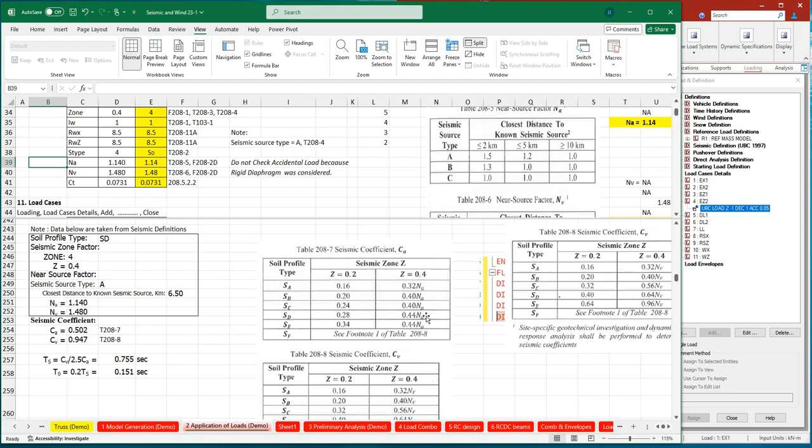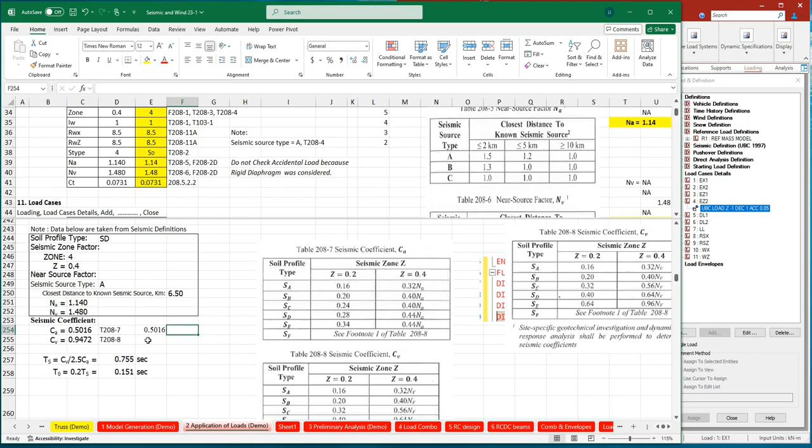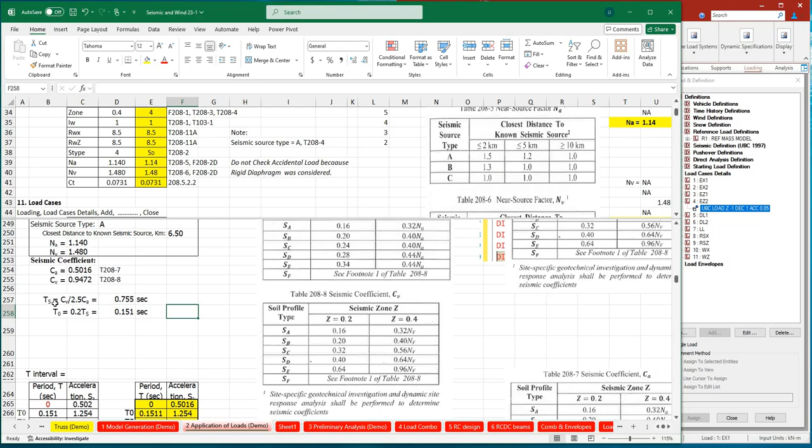And then, etong CV naman, that is from table 208-8. CV is 0.64 NV. This is based on 0.4 tsaka SD. So, that is equal to 0.64 times NV, 1.48. So, yan ang 0.9472. Next, punta tayo dito kay T sub S.

T sub S, yan yung period ng structure, which is equal to CV divided by 2.5 CA. So, that is CV 0.9472 divided by 2.5 times CA. Ayan. And yan yung 0.7553. And then, yung T sub O, that is equal to 0.2 times TS.

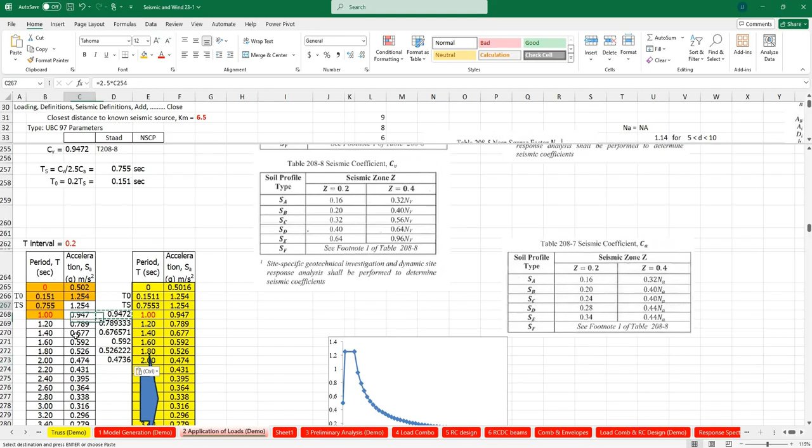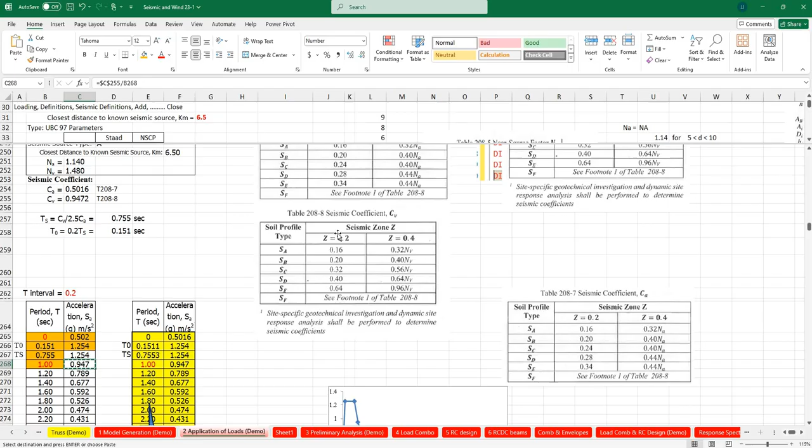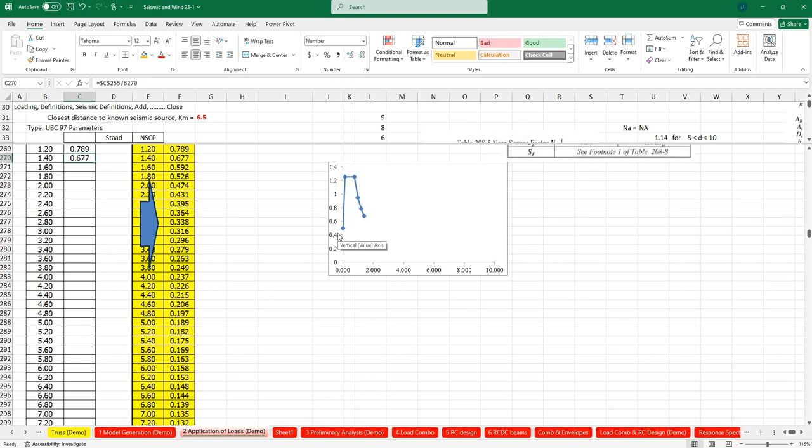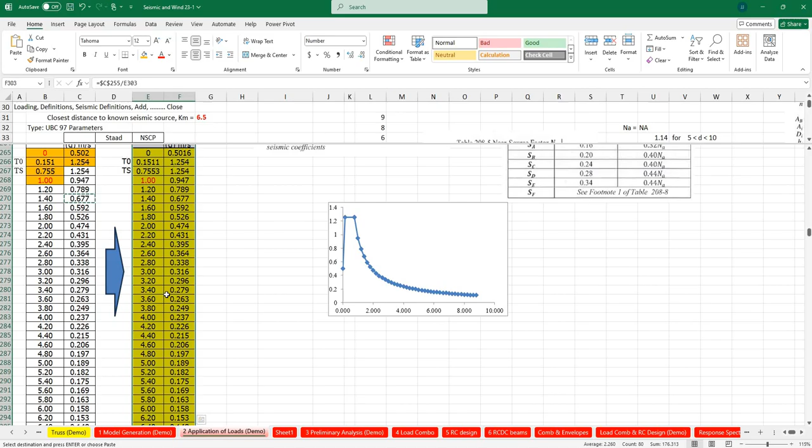Okay, so ulitin ko. This is equal to CV divided by period. So, I will press enter. Pero itong CV, i-fix ko yan. Then, I will now copy this. Paste ko na pababa. Okay, let's say, I will copy, then paste it going downwards. Okay? And then, itong colored box na to, kung paano ko isinolve to, kung paano ko ginawa ito, ganon din to. Okay? So, naulit lang. Ngayon, ang purpose nito is, ito yung ikakopy natin at ipe-paste natin kay STAAD.

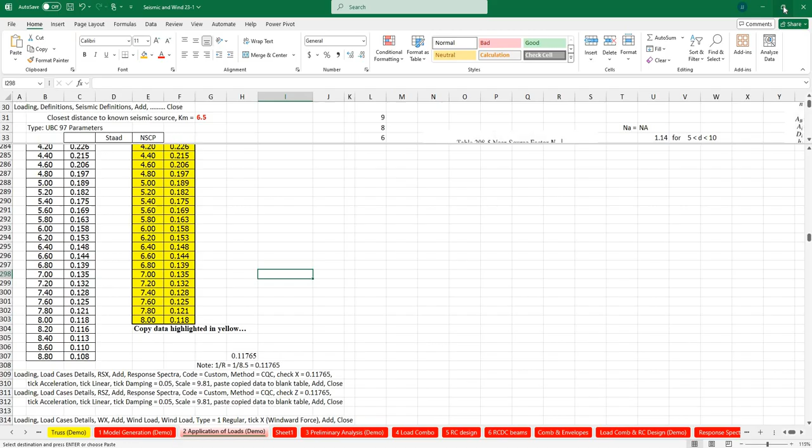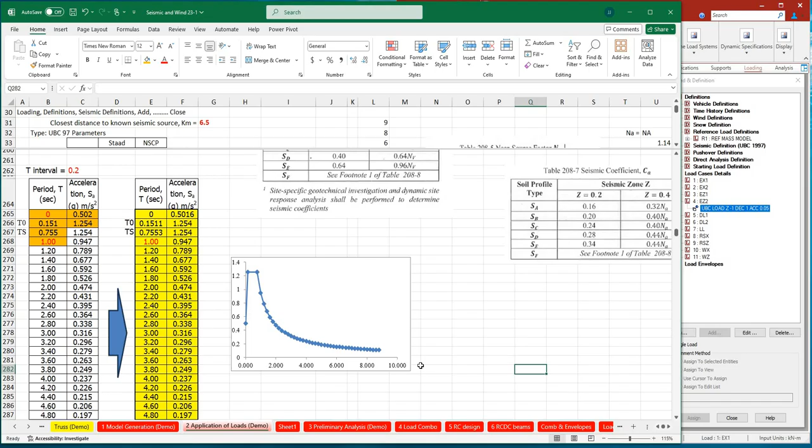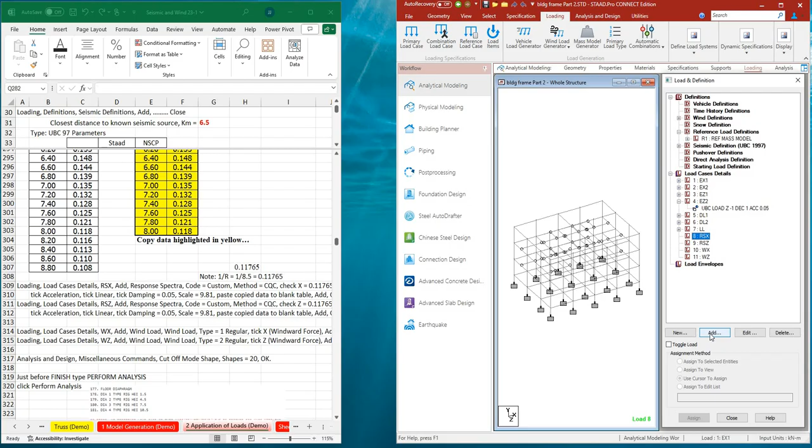Punta tayo ngayon kay STAAD. So, punta tayo kay loading. And then, load cases details. And then, punta tayo kay RSX. By the way, RS means response spectra. And then, you click add. I-click natin si response spectra. And then, ang code natin ay custom. And then, ang method natin ay CQC. And then, i-check natin si X. At ang value na ilalagay natin dito ay 0.11765. Ngayon, yung 0.11765, nanggaling yan sa equation na 1 all over R, wherein our R is 8.5.

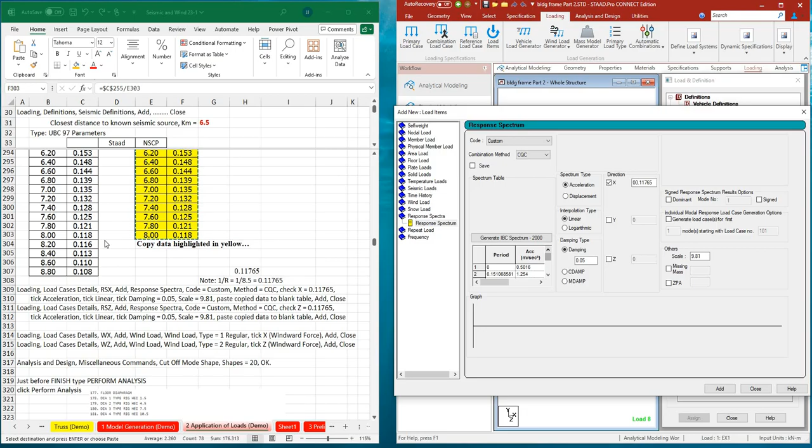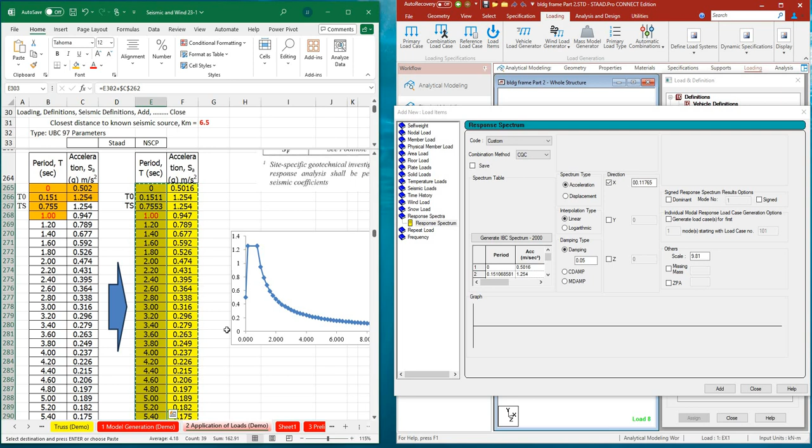And then, you take acceleration. So, yan ang ginagawa natin ngayon. Si acceleration ay ito. And then, tick linear again. At ang damping ay 0.05. And then, ang scale na ilalagay natin ay 9.81. Tapos, ipe-paste natin ang copied data, which is this, hanggang doon. Ipe-paste natin siya sa blank table. So, Control V. Mapapansin nyo na nandun na siya kahit cell 39. See? 39. Next is, we now click Add. And then, close. So, nalagyan na ngayon yung spectrum RSX.

We will do the same thing kay RSZ. So, you click RSZ. And then, Add. Tapos, response spectra again. And then, yung code is custom. Tapos, method is CQC. This time, we will check Z. Tapos, ang value niya ay 0.11765 pa rin. Tapos, you take acceleration, and then linear, and then damping is 0.05. Then scale is still 9.81. Again, we will paste the data here. Then you click add and then close.

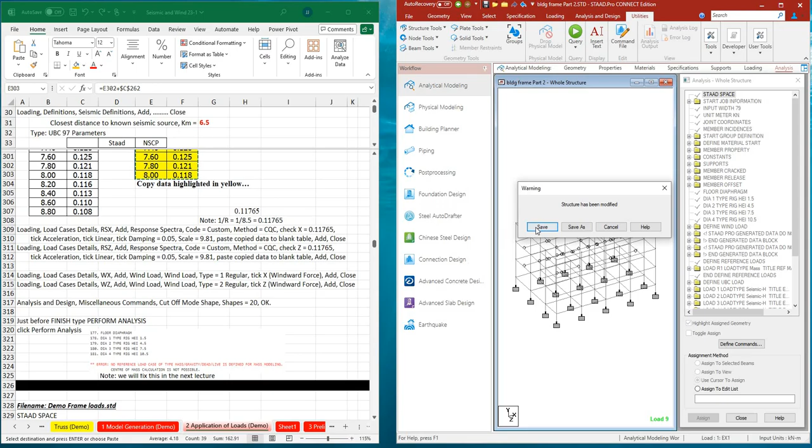Next, punta na tayo kay analysis and design. And then miscellaneous commands. Tapos cut off mode shape. Here is 20. Okay. Shapes 20. Then you press OK. Tapos sa command line or sa command editor, just before finish, let us type perform analysis. Oops, oh wait. Meron pa pala.

WX. So, punta tayo kay loading. And then WX. So, load cases details. And then, you click add. Tapos, wind load. And then, your type is 1. Regular. Tick X. And then, that is windward force. And then, add. And then, close. Then, ganon din kay WZ. So, add. And then, wind load. Then, type 2. Regular. Tick Z naman ngayon. Still windward force. Add. And then, close.

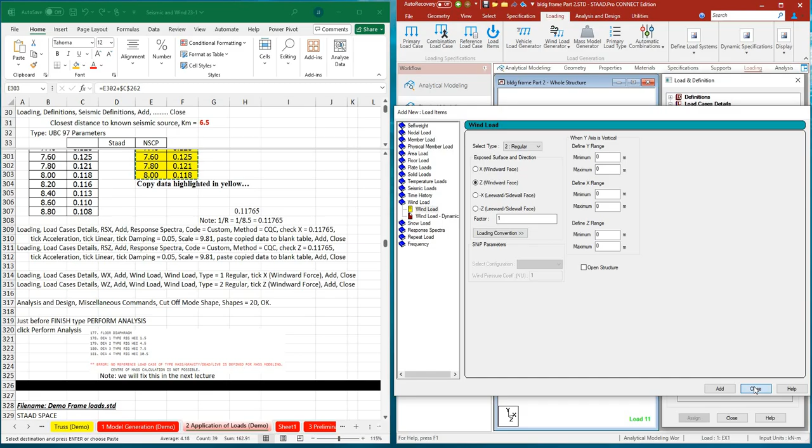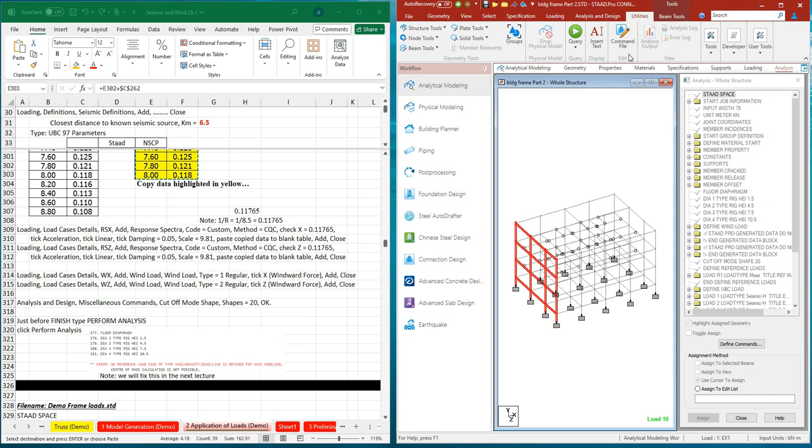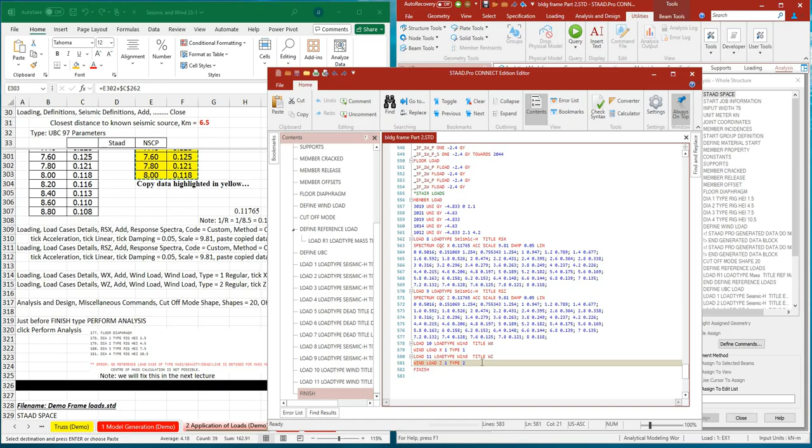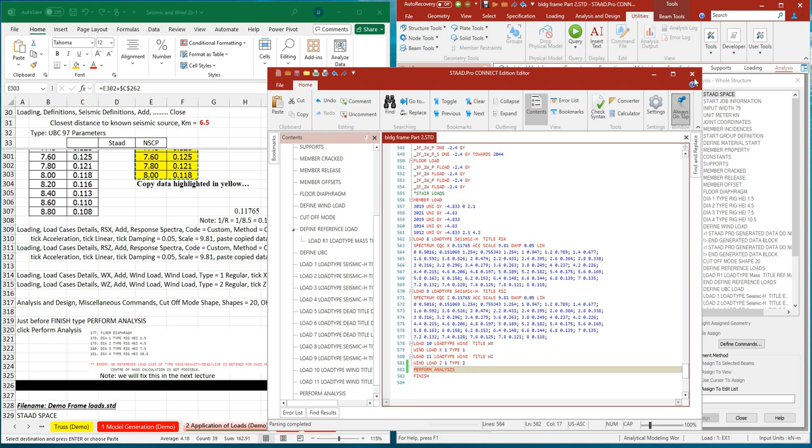Okay, next is, punta tayo ngayon kay analysis and design, miscellaneous commands, cut off mode shape is 20. And then, you press OK. Tapos balik tayo kay command file. Just before finish, we will type there perform analysis. Okay, so type natin dyan perform analysis. And then save. Tapos, click na natin si perform analysis. Ayan, si run analysis.

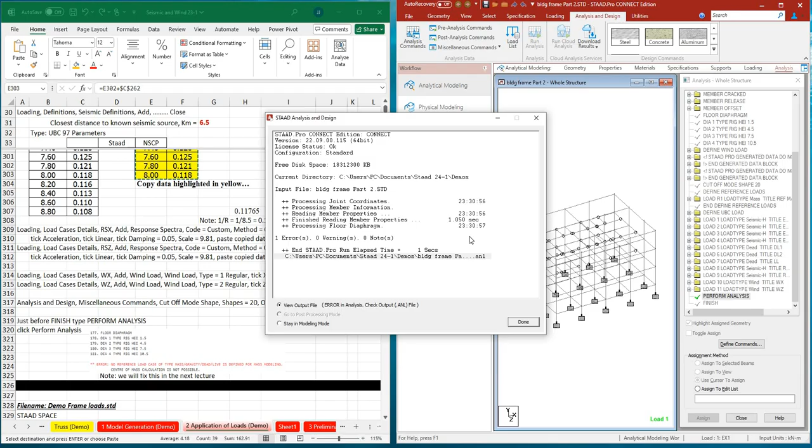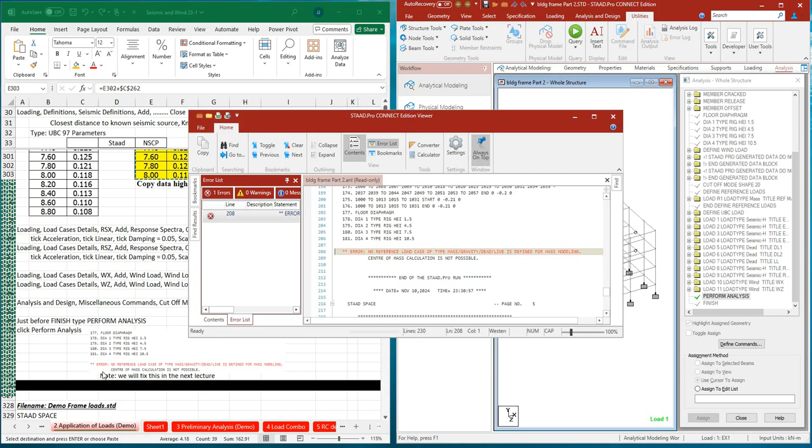Ayun, nagka-error siya. Okay, so pakita ko lang yung error. Ayan, yung error, lumabas. No reference load case of type mass, blah, blah, blah. Center of mass calculation is not possible. So, we will fix this in the next lecture. So, okay guys, this is the end of part 2, which is application of loads.